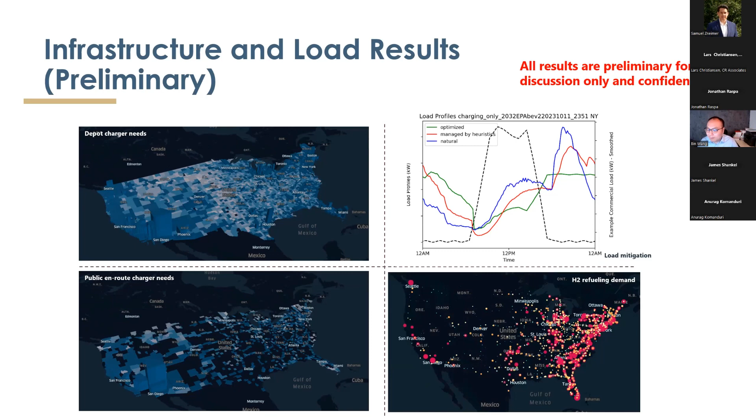This is another perspective of the model where we leverage the telematics from different sources, for instance, the ones from UC Riverside and West Virginia University, to characterize the travel demand, as I mentioned earlier. Specifically, we want the trip start time, trip distance, trip duration, and parking duration. Those statistics match the realistic data set we obtained.

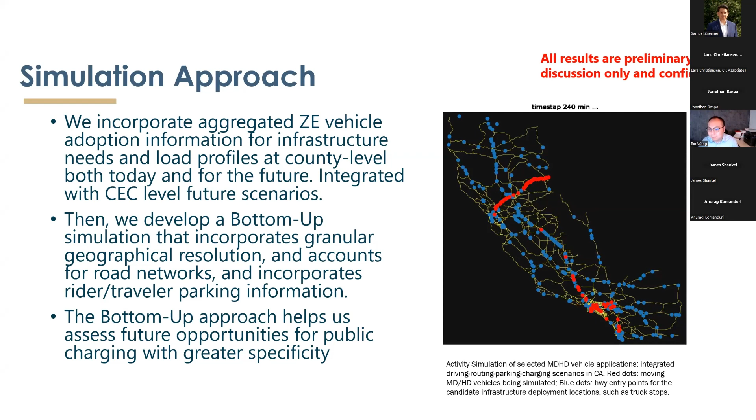As I mentioned, additional two efforts in this project will be unprecedented. One is the inclusion of tour-based travel demand models, which will cover multiple trips over multiple days for a given vehicle. Compared with the existing solution, each vehicle is represented by one trip, which is not very realistic.

So the tour-based travel demand from Cambridge Systematics team will significantly improve the modeling fidelity on the transportation side. Additionally, CalSTA and ARB team are offering additional location data for us to augment the candidate locations in this study. I noticed that ICF also has great work in this regard.

So hopefully we can incorporate additional realistic location data in this study to augment analysis. Given all these improvements, we want to allow the intelligence at the vehicle level to decide when to charge, where to charge, which is critical for the public en-route infrastructure planning. And hopefully in this project, we can resolve this problem and bring more insights to the public. So very happy to be involved in this project. I will pass it along to Anurag, please.

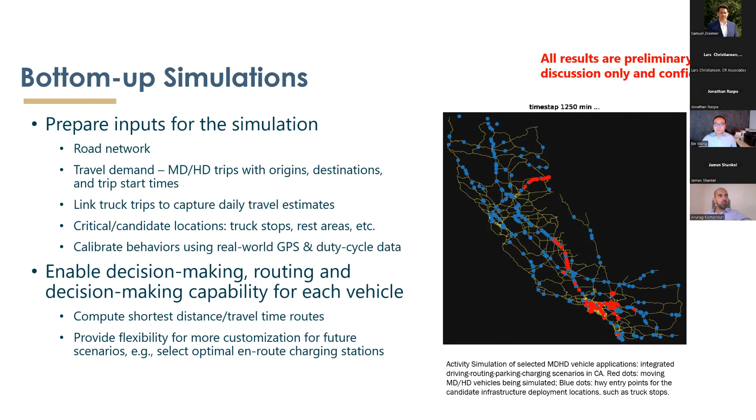Bin, thanks. I know it's a difficult topic for many of us in transportation to connect the dots, but you did a pretty good job helping us understand what the energy demands are. I'll just summarize all of the work that's going in and show how this leads into the work that my colleagues from ICF will present. But if you can go to the next slide, please, Lars.

Again, as we start thinking about the scenario planning, I just wanted us to get back to what the scope of this effort is. When we start thinking about fueling options, it's either depot or overnight charging, en route public charging infrastructure, but there could be en route private charging infrastructure as well, and then hydrogen fueling, which we primarily think will happen en route. This study tries to help us focus on the need for public charging infrastructure, right? So it's a narrow band because we believe the scope of the study helps build a roadmap for all of us to start thinking about where those locations need to be.

So if you go to the next slide, as we start thinking about the scenarios, and we are talking mostly about future years, right? And we'll come up with scenarios for 30, 35, 40, and I believe 50, about what the needs could look like. There are some global metrics that we need to think about. One is the horizon year. And then the second one is the range of selection between electric versus hydrogen.

And then there are some travel behavior adoption rates, right? You could have different electrification rates or different zero emission rates by different market segments. And the market segments could be truck class size. It could be local versus interregional travel. It could be specifically looking at port trips. So how do you vary that rate of electrification? So you will have a few levers to test or to assess within the model.

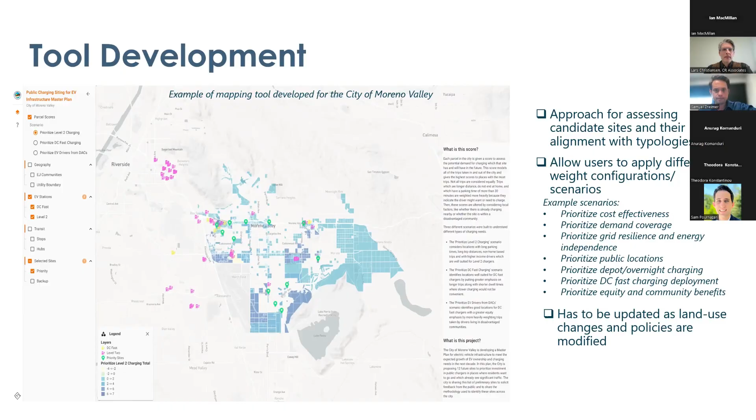Okay everyone, thank you for those presentations. I'm very pleased to present 2 guest speakers today. One is a member of our TAC, Mr. Tony Zamora of Travel Centers of America, and the other is Patrick Cruz of Forum Mobility. We're going to begin with Mr. Tony Zamora, who will be presenting on his experience and Travel Centers of America's experience with developing a charging site.

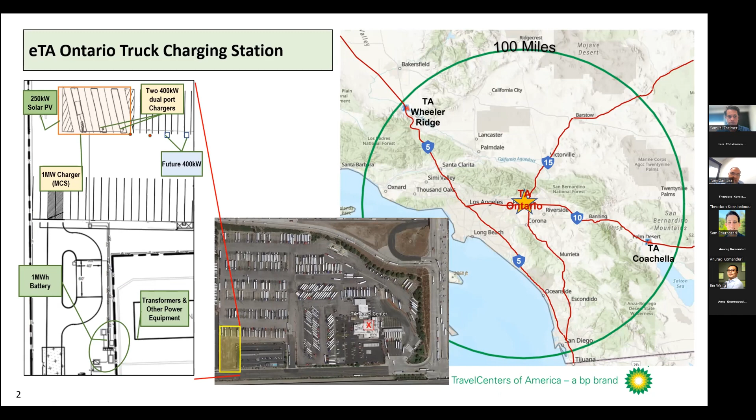And so collectively with our partners, these are our key goals, honed down to a few. First of all, we want to support our fleet customers that are beginning to transition and are thinking about transitioning to zero emission vehicles and battery electric trucks. Also, this site is a research and development site for us - we've learned a lot, and we will be learning a lot through next year during construction, and then in operating it, we'll be learning a lot.

And in particular, we're excited to be installing what I think maybe - they tell me at EPRI, my friends at EPRI tell me we may have one of the first megawatt chargers operating at a public site in 2025. In addition, we support local workforce development for electric truck service - we have technicians that will be trained on electric trucks. We also, you know, the key I think that we all want to learn is whether there's a business case for public access charging for heavy duty electric trucks.

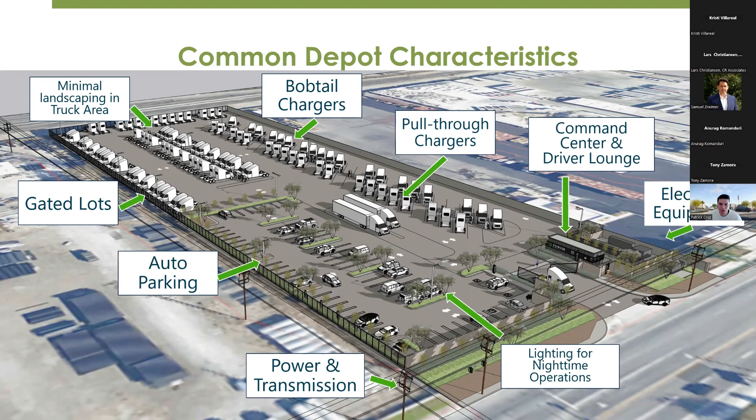So on the next slide here, when it comes down to where depots are located, it's a pretty straightforward formula. You need to be in existing industrial areas, proximate to freeways and truck routes, jurisdictions with a straightforward permitting pathway, and then critically, of course, no-brainer, power.

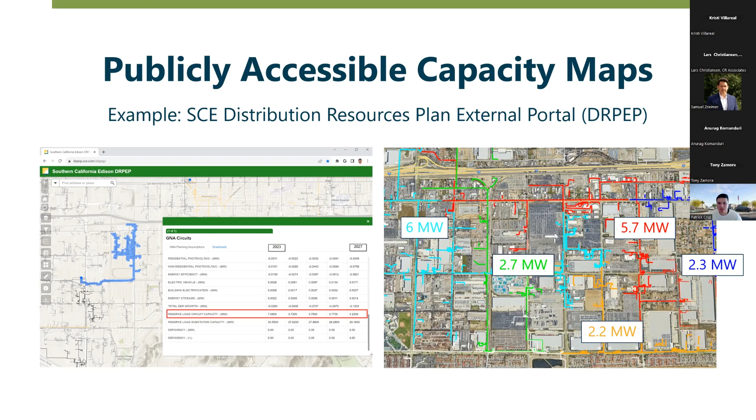And I'll tell you right now, it's less than 2 months. It's a very quick turnaround process, which when you're talking to cities who are not familiar with this, it's a bit of a shock, and it takes some time for them to digest that.

So this all sounds fantastic. And the problem that we've run into is the legislation doesn't really have any enforcement mechanism. Jurisdictions have told us in the past that a use permit would be required, and it's taken about a year to get through that process.

This often comes up in some form around truck parking, where you plug in your truck Friday night and pick it up Monday. If the truck's only charging for 6 hours, it's ready by midnight Saturday morning, and the rest of that time is truck parking. If truck parking isn't allowed within, say, the M1 zone, you've got a problem there - that's a very strict interpretation of the zoning code. I think we're really going to need to address that in the future if we have any hope of meeting our zero emission infrastructure goals.